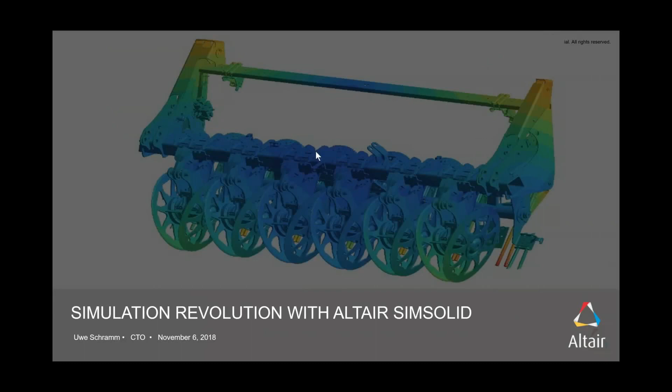So, Altair at a glance, a little business update to Altair. So we are around for 32 years. There's over 2,000 employees, 5,000 customers, and we have a worldwide network of offices where we do distribution of software, but also software development. So our development is not just in one place, we are all over the globe.

And our products are marketed under 4 different brands. So the most known is probably HyperWorks, where you find technologies like HyperMesh and OptiStruct. We are branding it today as a multi-physics optimization platform for CAE engineers. So it's mostly at high-end organizations, organizations that do a lot of CAE, like automotive OEMs and aerospace companies, but also other industries.

Later, around the design technology and OptiStruct optimization, we developed the concept of simulation-driven design. And this has been branded under solidThinking, where you find products like Inspire, and also the math products like Activate and Compose. And then two years ago, we did an acquisition in the space of the Internet of Things that is now marketed under the brand of SmartWorks that will do the digital twin technology and so on.

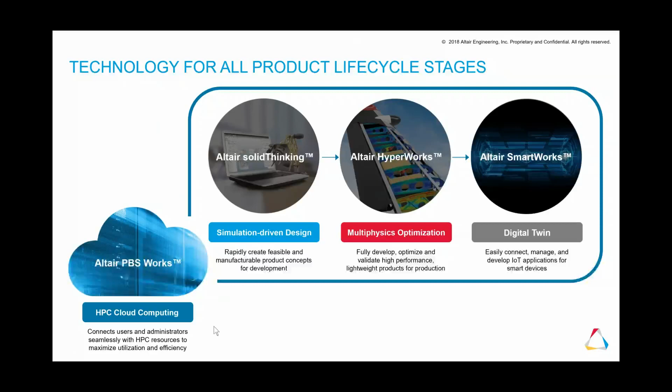And then, of course, for high performance computing and cloud computing, we have the brand of PBS Works, which started actually in the early 2000s with the acquisition of PBS from NASA. All our software technology is marketed under a units-based subscription model. You probably know the HyperWorks units. This year in September, we introduced the solidThinking units. So we have 2-tier units where you license our product.

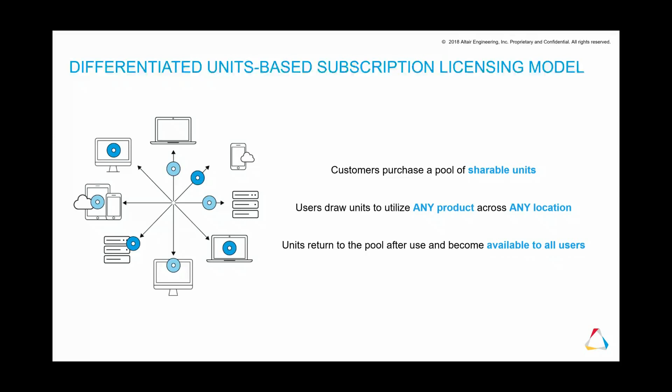So you buy a pool of units, and then basically the software application draws a number of units. When you're done using the software applications, the units go back in the pool, and somebody else can use the units, or you can open another software product. The solidThinking units are focused on the Inspire products and the math solution products, while the HyperWorks units allow you access to all the technology developed at Altair, plus a number of applications from our partners. So with the HyperWorks units, you have access to about 150 software titles. That is a lot of value that you get with those units.

Our vision is to transform design and decision making by applying simulation, machine learning, and optimization. And from that perspective, you really have to see the new technology that Ken is going to introduce to you. When we saw that technology, we were really excited to find a piece of technology like this that really helps to accelerate the use of simulation in decision making and during the design process.

Our software development focus is on mixed fidelity multi-physics development. So aside from typical finite element solvers, we also develop 1D solvers. We develop different couplings. We use data-driven analysis, machine learning in our simulations. And this is really where SimSolid fits in, giving more technology for modeling structures.

Computational performance is really important to us. So all our solvers are highly parallelized. In this day and age, we have CFD technology that's based on GPUs and so on. And you will see with SimSolid that the computation performance is quite amazing, and is really cutting down the entire process of setting up a model and getting a result. And then, of course, pervasive optimization. From the beginning, we built our technology around optimization, and we will also put optimization together with SimSolid at some point.

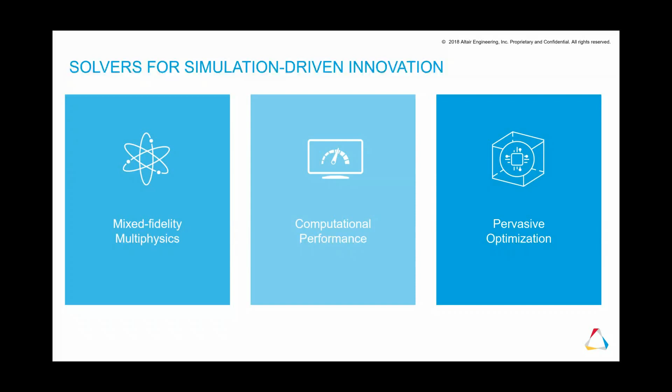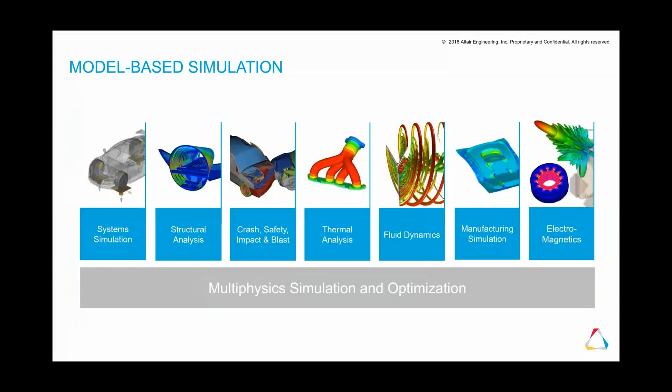So we cover the entire portfolio of physics: system simulation, structural, thermal, fluids, manufacturing, electromagnetics simulation. We have all these different solver technologies connected through solver coupling, but the main idea of using simulation in the design process is the connection through optimization. So we will build optimization into all these tools to do multiphysics optimization to a more or less degree. In OptiStruct, for example, you have a complete integration of the optimization with the physics, and you can use HyperStudy also to do optimization for other nonlinear physics.

So our solver technology really covers the entire physics that you need to design a product, and it's connected with design optimization, machine learning. And for us, when we saw SimSolid first, it was really that SimSolid is a good fit in structural simulation during the design process for designers to give easy access, and also in the context of Inspire, where we take OptiStruct technology and manufacturing technology and bring it to the designer, and we will do an integration further down the line.

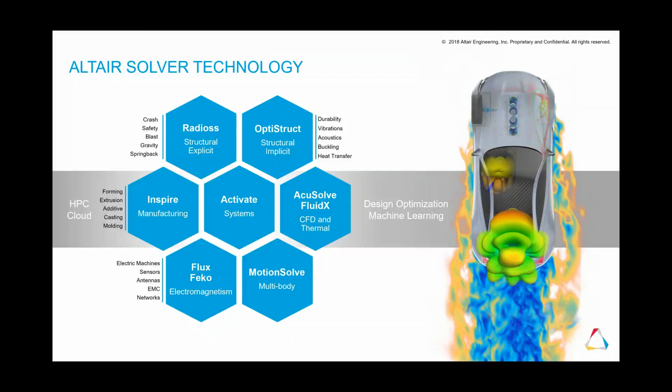Ken will talk a little bit about the business model. So it was for us really exciting that we could get together with SimSolid people and acquire SimSolid. We made the announcement in October at our ATC in Paris. SimSolid is working off CAD assemblies and provides really fast and accurate robust structural simulation without the requirement of geometry simplification and cleanup.

Victor, Ken, great people that joined the organization, and together we're going to pour investment into SimSolid and really try to bring a really great solution to you guys so that you can iterate faster and develop innovative designs. So that's about it for me. I will hand over to Ken to introduce the technology itself.

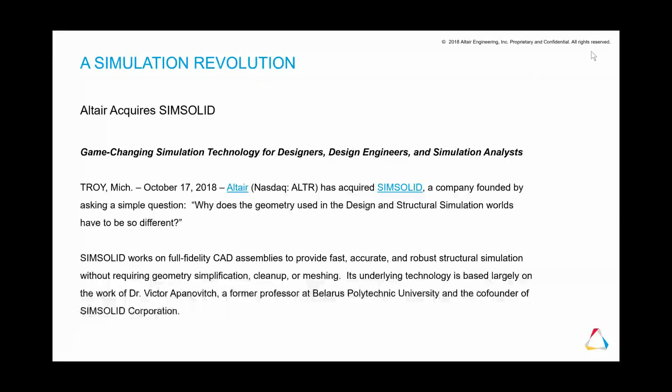Okay, do I have control there? Yeah, so show my screen. How's that? Can you guys see my screen?

Good. Yes. So I'm Ken Welch. I'm one of the two co-founders, as we mentioned. We started SimSolid 3 or 4 years ago, and when you start a company, you have to think about solving a problem. For us, that problem was what I called the mesh problem. So what was the mesh problem?

Analysis is just tough to do, and the reason it's tough is you've got to make a mesh, and making that mesh is a very complicated process. It's a very slow process, and it's complex to learn how to do it. Meshing is really a problem in the design process. If you think about doing design analysis, it's a time limited process. And if you have a very complex, long-winded, hard to use methodology like meshing, it just limits you in analysis.

It's funny, when we started the company, we talked to a lot of people, and there was a big disconnect we found in the CAD market. All the CAD guys were talking about, we have this democratized analysis. It's got a very nice UI and it's embedded in CAD. And all the users said that stuff doesn't work. And I said, well, how could it be? It doesn't work? Well, it works great. It just doesn't work on real world problems.

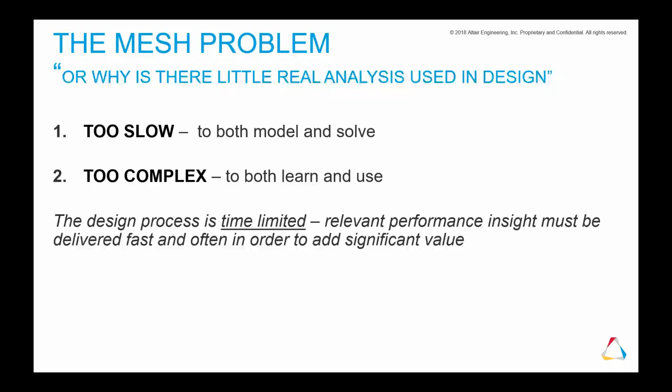And that's the thing. It typically works on very simple problems. And analysis in the past has been limited to very simple applications, which limits its appeal. So our view was to take a fresh look, and the fresh look is at a very core level. So SimSolid is a new technology. It has a few nice attributes.

Number one, it operates directly on the unsimplified CAD geometry. So you don't have to take the geometry and mid-surface it or defeature it and all those kind of things. Just take the original geometry and it works on that. And it doesn't create a mesh. So using the original geometry and not creating a mesh, it eliminates a bulk of the pre-processing time for analysis.

The other thing about SimSolid is it's very high capacity. We tuned it specifically to solve both large assemblies and complex parts. So take your original form, you don't have to go and break off just one or two parts. You can analyze a large subassembly or a very complicated part directly.

Now, because it's meshless, accuracy is controlled by an adaptive process. It solves multiple times, and every time it solves, it looks at the errors in the solution and locally enriches the equation and resolves. So it's an automatic adaptive process. You can't turn it off.

And we said if we're going to be used in design, it's got to be fast. Our target workflow is to give you meaningful results in seconds to minutes, even for a large assembly. So that's a pretty audacious goal. But when we started the company, we said those are the things you really need to have in order to have an impact with analysis in product design.

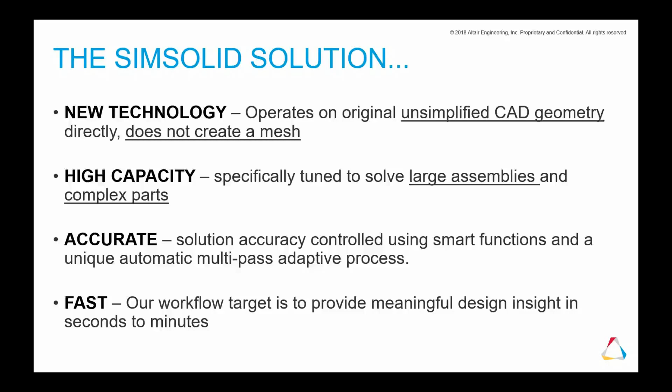So I talked about product design. So where does it fit? Well, clearly we think it fits in an area where you're doing rapid design ideation, right? So if you're trying to evolve a design and you want to understand the performance insight early and often, that's SimSolid. If you look at the classical product development V, we're typically at that front end.

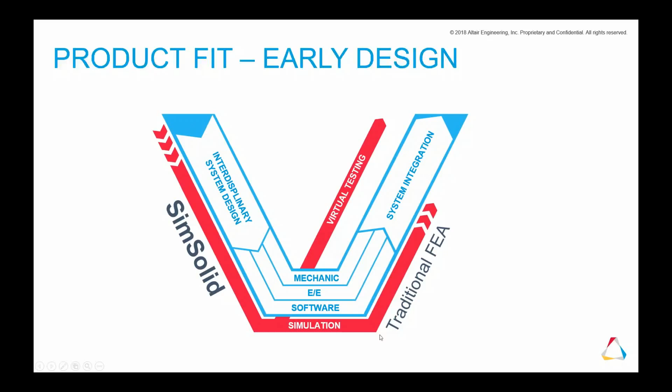We're not a validation tool. So it's really not to say, oh, I want to find the nth degree of stress. I mean, you can drill into stresses, but really the strength of it is using it in design. The traditional tools are over here in the validation phase.

So, what I always say is that FEA requires geometry adaptation to mesh. You have to change the geometry. Our goal with SimSolid is to accept it as is.

People say, well, the meshing's the easy part. I say it is easy until you have an assembly that has both big and small, thick or thin parts, which is very common, or until you have parts with extreme geometry detail, like small holes and fillets, or odd face transitions, which can be problematic for mesh generation.

One of the very topical things today is this generative design kind of parts, all these lattice parts. These are typically very difficult to mesh.

But the number one problem, I think, in terms of doing quick performance simulation is trying to connect different parts together. Parts may look aligned, but mathematically there's a small gap or an overlap, and this can be problematic in terms of bonding these things together or building connections.

One of the founding principles of SimSolid was we came up with a new method to build a connection between parts that can have a little ragged connection, that can be overlapped or gapped. What we do is use this connection as part of our criteria on the adaptation.

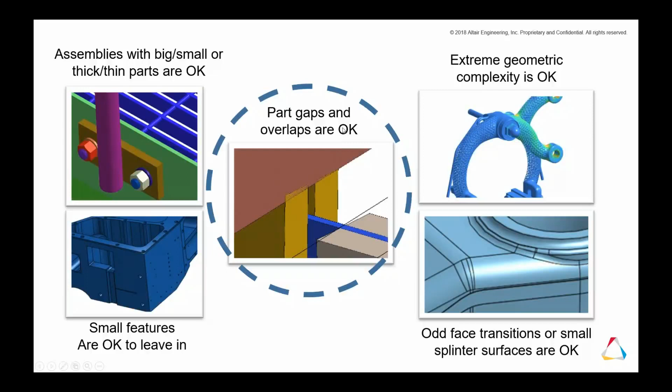So let's talk about how it works. I think everybody knows the background of traditional FEA. You typically have a simple region that for 3D is a TET. The degrees of freedom are typically point-wise, and for structural analysis, typically displacement-based.

Again, for TETs, 3 degrees of freedom per node is common, and the shape functions are low order—linear, quadratic, things like that.

SimSolid is much different. It doesn't have a region like a TET. The regions can be completely arbitrary. In fact, they can be whole parts. And the degrees of freedom are not point-wise. They can be associated to anything: volumes, surfaces, lines, or even point clouds.

So there's a lot of versatility in how we can construct the equations. The degrees of freedom are integrals—abstract coefficients, not physical displacements. And there can be many degrees of freedom per geometric entity.

The shape functions can be of an arbitrary class, and are actually derived on the fly for every single part, which is a little bit unique to our system.

But probably one of the most interesting things is this boundary compatibility. Now, if you take a cantilever beam and fix one end in finite elements, what you're saying is the degrees of freedom, or the displacements at that end, are exactly 0. You specify exact boundaries of 0.

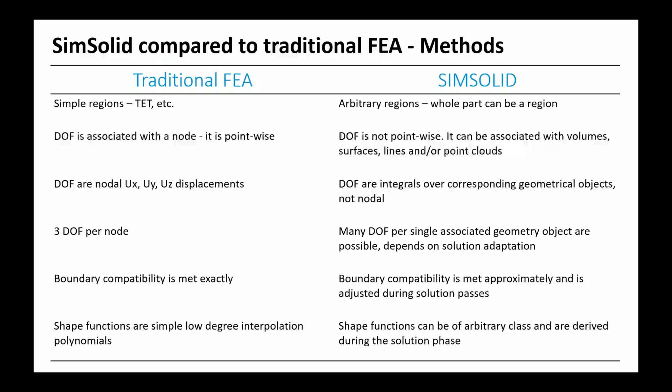If you think about accuracy, let's look at traditional FEA. A lot of the accuracy is really the decision of the user. You have to decide yourself what the appropriate level of geometric detail is, what type of elements, what type of mesh density, what distribution.

You have to decide for yourself, and this is where most people or many people get in trouble, is understanding the correct interpretation of the settings. If you look at dynamics especially, there are many, many settings that you can possibly set in traditional methods.

And every time you can change the setting, it's an opportunity for error. We find that many codes are not running incorrectly, it's just that the user's interpretation of the correct settings is not being made.

Almost all finite elements today can have automatic adaptation, H or P adaptivity, but typically that's rarely done for assemblies. For us, we have the full geometry detail - there are no elements, no meshing. We have very minimal settings for dynamics or nonlinear, even separating contact with friction, and our solution adaptive is always active.

So again, we're trying to build an analysis system for design, and all of these areas in traditional FEA are bottlenecks in design. You can see that's the reason we went on this route with SimSolid.

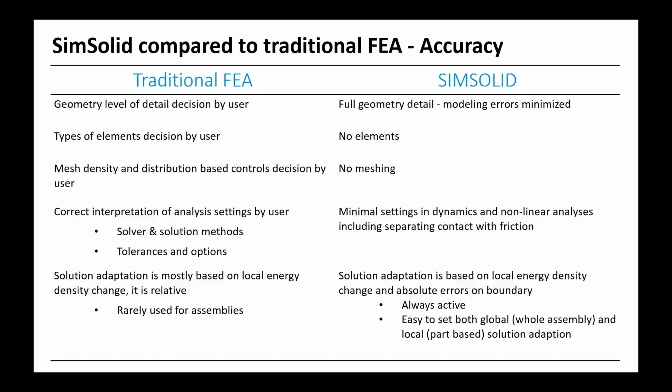So just talk briefly about what it does. We wanted to have a system that could run rapidly, but it had to be meaningful, so it does quite a bit for design code. It does linear statics, modal, nonlinear statics that can be either geometric or material. It does transient dynamics that can be time, frequency, or random response, and base excitation as well. It can do thermal and thermal stress, and we have things like inertia relief and bolt pretension.

Our materials today are isotropic. You can make parts rigid, and we have a simple elastoplastic model. This is an area we can extend quite a bit in the future, but today it is isotropic.

Since we really focus on assemblies, we spend a lot of time with connections. We have a rich set of connections that can be bonded, sliding, separating with friction. We can do bolted connections, spot welds, seam welds, and we can even do virtual connections, which are just rigid connections between different faces.

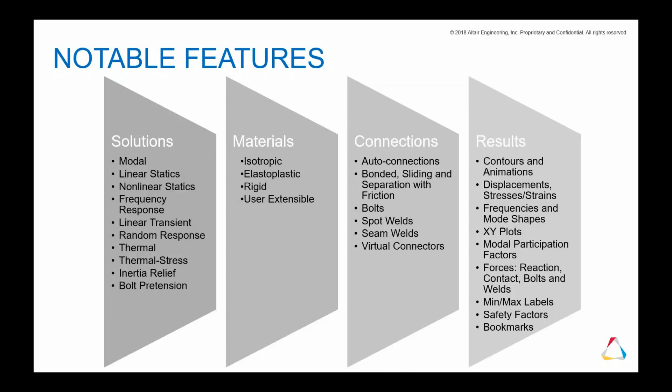So we'll show more detail during the demo. Just to give you a couple ideas on what the capabilities are.

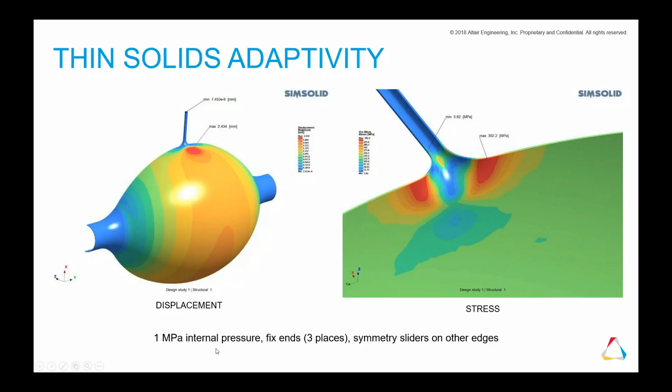We can do bolt tightening, and the bolt tightening is a little bit unique in that it's full 3D. There's some information on our website in terms of the theory we use, but it's a full 3D representation.

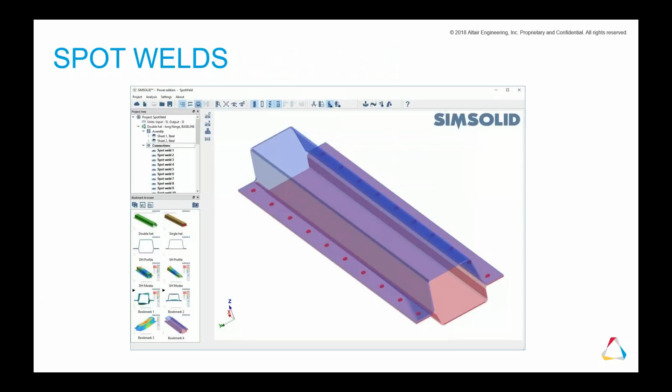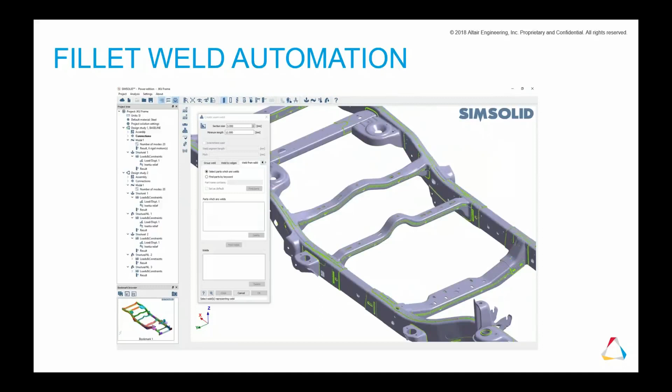We do spot welds - they can be applied manually, or you can bring them in from a CSV file. We can do fillet welds, and we can do fillet weld automation. The automation is interesting - we can bring in tube bodies from the CAD system and automatically convert them into welds. So if you have these 3D structures that are common in CAD, you can bring them in and convert them automatically. You can also make the welds manually as well.

We do sliding contact, bonded contact, and separating contact - this is nonlinear separating contact. This is interesting for us in that it runs fairly fast. I'll show you a demo of that.

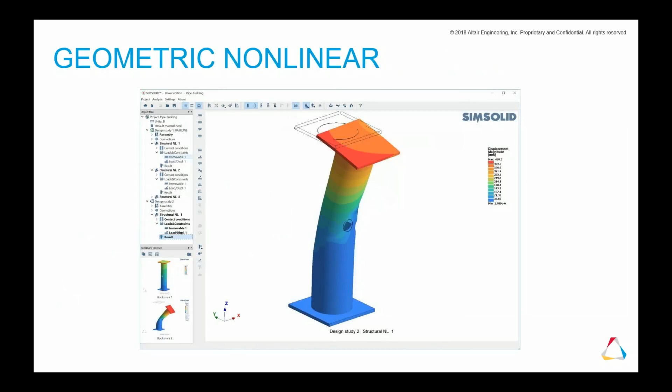We can do geometric nonlinear. We don't have linear buckling, we don't have eigenvalue buckling, because it really doesn't make that much sense for assemblies. But you can do geometric nonlinear to see if you have a buckle shape. We can do simple elastoplastic, mild nonlinear, really just for ductile steels, but we can do that and combine it with geometric nonlinear.

We can do transient dynamics, and that's interesting in that dynamics are really a data problem - you have to store a result for every time step, and it typically can be quite large. For us, we don't store any of that - we only store our analytic functions, and then we have a way to recover all the data in post. So if you look at a typical dynamic simulation, our result footprint is orders of magnitude less than what you see in traditional methods.

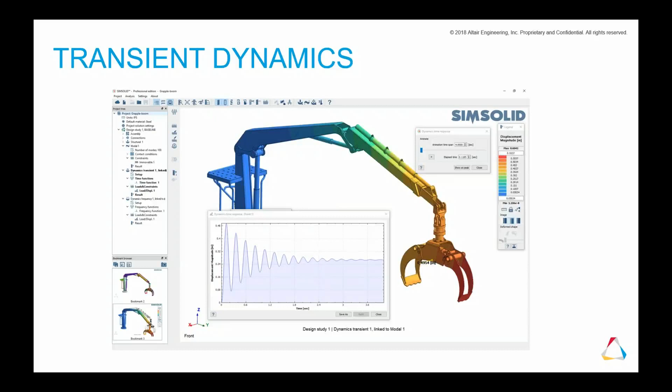Maybe a few quick customer applications, just to show you some typical ways SimSolid is used.

Serapid, a company in Michigan, are a very early customer and SolidWorks user. They build really innovative, very cool vertical chain lift technology. You can see they're quite complex, and they analyze typically the entire assembly, even sometimes with the lifting table, all done with SimSolid.

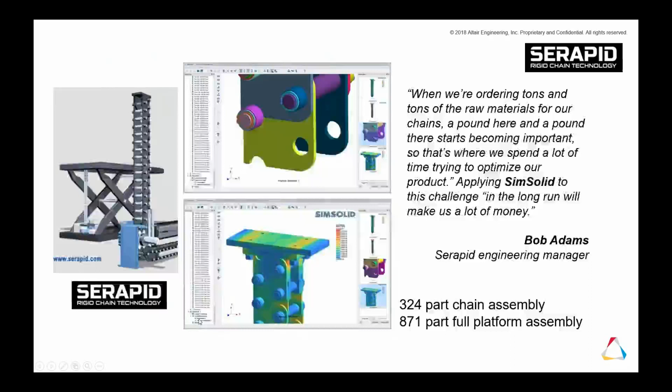Here's a second application. For them, they told me, honestly, we do an analysis but didn't use it as much as we'd like in the past because it was too complicated. With your stuff, we use it every day, and we can look quickly to understand, as we make design changes, how the load path is changing. They're not trying to look at detailed stress studies, but they want to know how their design is evolving and how the overall response is changing with the design.

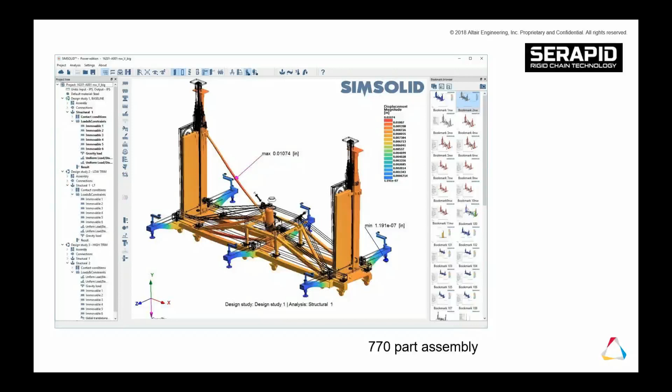You can see here, this is almost an 800-part assembly. They have many design studies with different design configurations they're evaluating in SimSolid.

Adron Handling is an interesting company. They're in the UK and make bespoke manufacturing equipment for automotive. This is an assembly line, a tire handler, so those are actually tires.

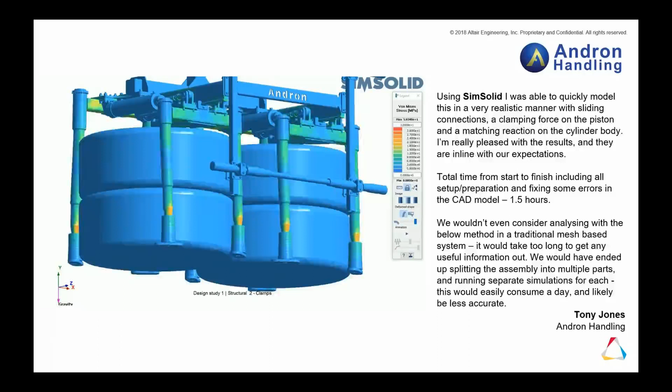This was an analysis they recently did. In the past they would have had to do a number of smaller component analyses and work to understand the load paths. They said with SimSolid, they could do this analysis start to finish in about an hour and a half, so they were very happy they could get insight quickly even on a very complex assembly.

This is another example of theirs. I like this one because it shows the difference between bonded and separating contact. The typical way would be to just take that plate and bond it to that tube - there's nothing wrong with that, and you'll get a perfectly connected boundary. But if you have bolts like that and make it separating, you'll get a more realistic distribution of the load.

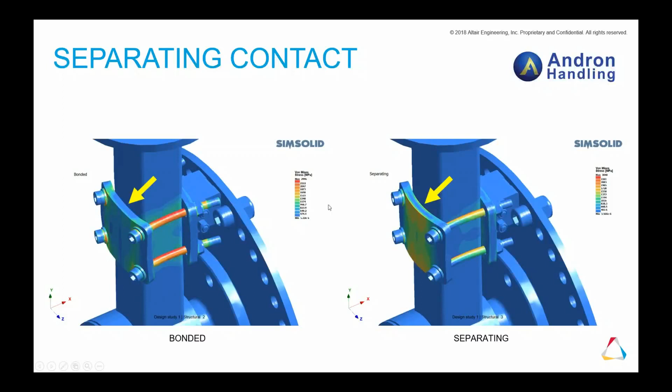This typically takes, I think this was about a minute to solve, and this one was about a minute 20. So it's really not that big of a penalty to turn on separating contact. It does iterate - it's nonlinear - but it's a nice effect to have the ability to turn on.

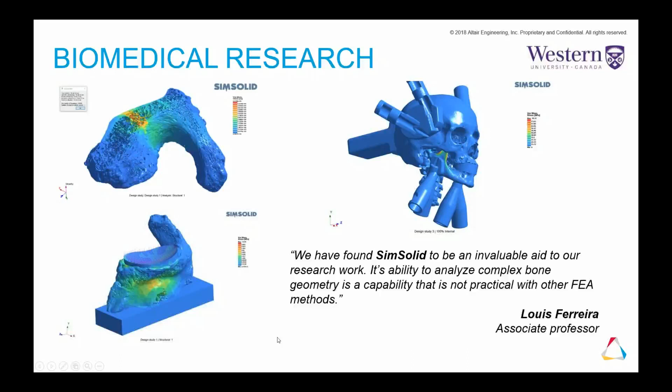Okay, why don't I see if I can start it up and do a little demo, let's just try it. Here is the product on our desktop, and this is what you see when you first start.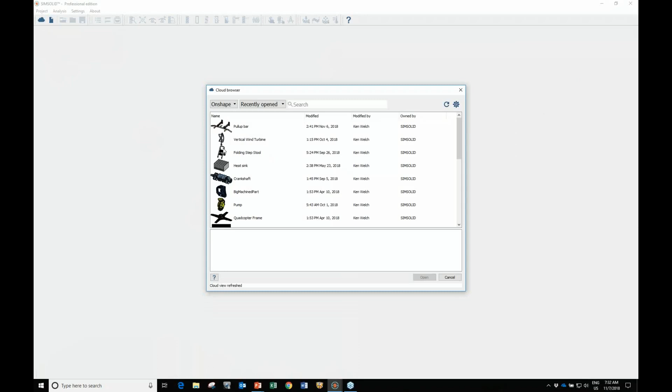Let's bring in some geometry. Now I can bring in geometry from just a CAD file - CATIA, NX, Parasolid, Step, etc. Or I can also bring it in from a cloud source - this is Onshape. So I'm just going to grab a model, and I'll grab this one right here.

I'm going to do a real quick analysis, but I just want to show you the workflow. So this is a pull-up bar. Let's first just create the connections - okay, so that creates all the connections. This is about 33 parts.

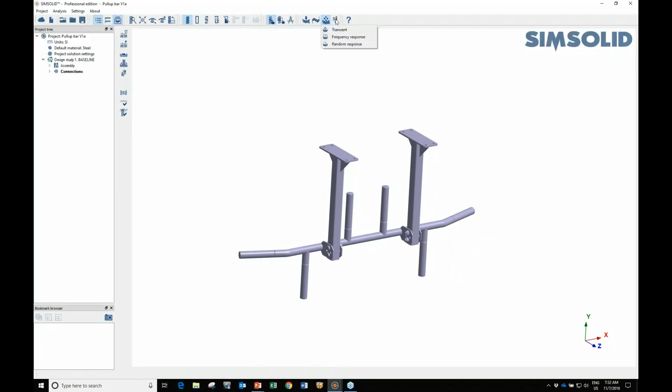Let's do the analysis. I can do structural, linear, non-linear. I can do modal, I can do transient dynamics, thermal, etc. Let's do linear - let me just constrain the back here, let's just do something quick.

And then let's just load the ends here - maybe something like minus 500 newtons, I don't know. Okay, then I just say go. That's it, so I didn't do anything other than that.

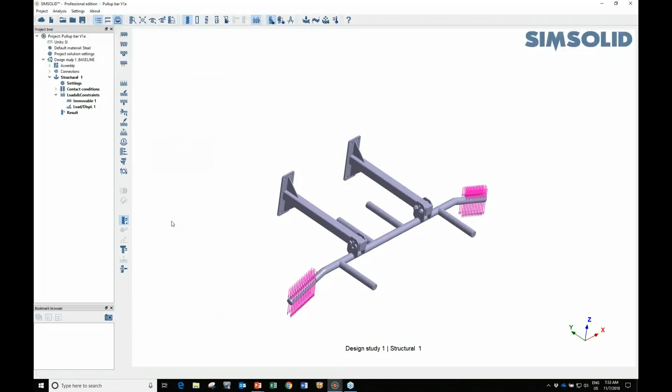It's now solving - 1, 2, 3 passes. In fact, that was solve, mesh, iterate. So I can now look at displacements - I think that took about 4 seconds to solve, and I can animate that.

I can bookmark that animation. Maybe I'll stop that, and instead of displacements, I'll look at stresses, and I'll bookmark that.

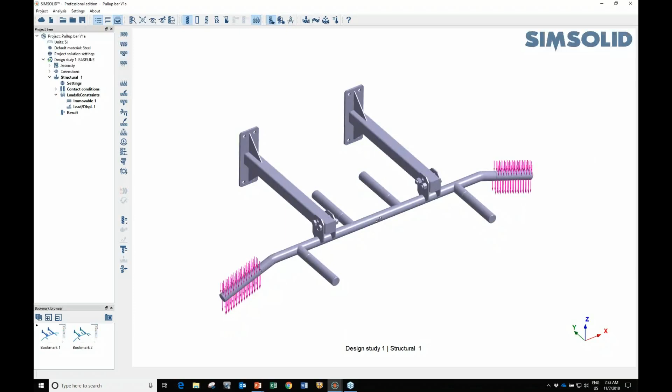So that's great. That's nice that I can get an analysis very quickly, but I can also do a few more things. Let's just copy that. Let's double click to edit the load. Let's just pick these 2 things and delete them. And let's move the load path. Let's move the load back here. Okay, let's just run that.

Now, reanalysis is even faster. I think it took 4 seconds for the first one. That was 2 seconds. And again, that was solving 3 passes. So it solved the pass, looked at errors, locally enriched the equations, resolved, relooked at errors, and iterated.

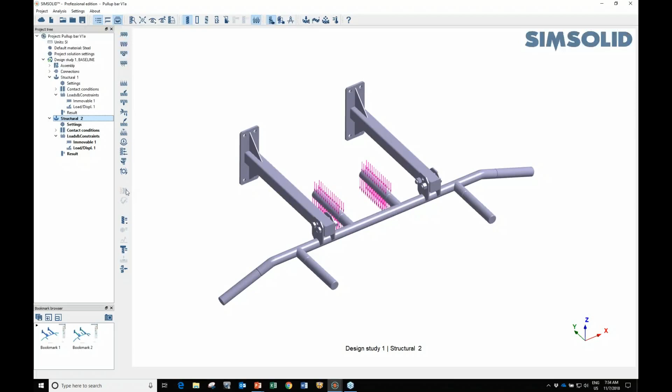And if I pick the bookmark, it'll go back. You see where it's bold here. This is the first result. So there's the first result. But I can just pick down here, and there's my second result. So I can very quickly go between, there's my displaced shape for load case 2, and there's for load case 1. Okay? And I can do the similar thing for stress. There's stress for load case 1, stress for load case 2.

Well, I think that's pretty cool. I mean, I can do a very rapid analysis and assembly. And I can also tweak the values if I want to drill into more local stress detail and things like that. But really what's the power of the system is you want to understand design change. So let's assume I go back to my CAD system and I grab a different configuration. I could have changed the model in the CAD system or just grab a different configuration altogether.

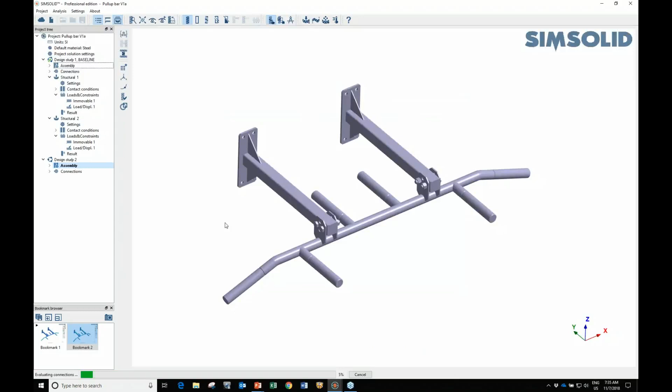And as I pick this one here, it'll bring in the changed geometry. But you see what happens, it says, this is new geometry. I'm going to assume it's a second design study. I'm going to copy down all the boundary conditions and load cases from the first. So everything's ready to go. All I have to do is pick here, and it'll run both load cases. That's load case 1 it's running, and then there's load case 2.

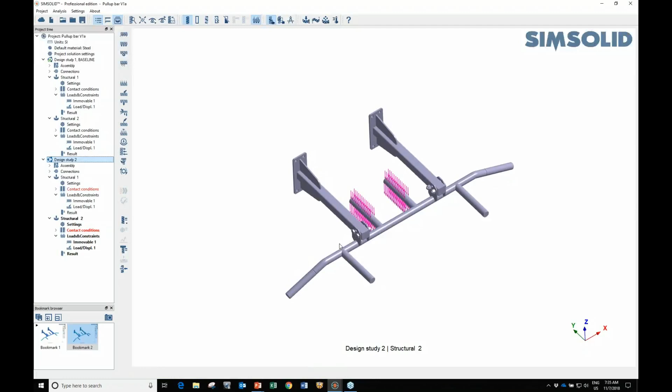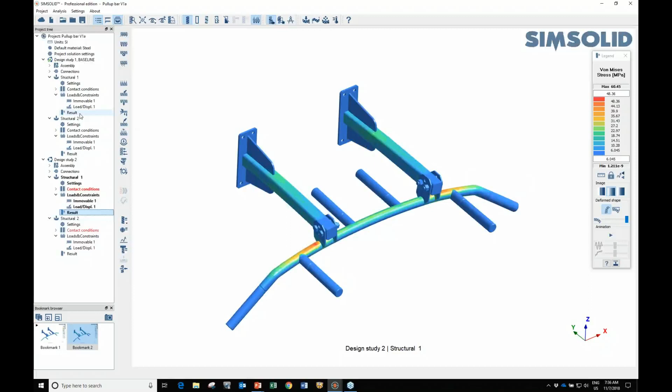Okay, so now I've just run 2 load cases on 2 different geometric configurations, and I can scan through there the same way. There's geometry 1, and I just pick here, there's geometry 2. You see that the back is a bigger thing. So I can go quickly between geometry 1 and geometry 2. And the same thing for stress. There is stress for 1, there is stress for 2. Back and forth. And again, also for 2, I can look at load case 2, load case 1.

So our workflow is we're trying to say, I want to do it on the real geometry. I don't want to simplify it. I want to make as few assumptions myself as I can and get a result quick. Now, there were a few things that happened in the background that made it go fast. One, geometry comes in, we evaluate the geometry. If we see bolts, let's find it as a bolt. And we use that because we want to do a bolt pre-tension later.

But also, as we identify bolts, we actually change the connection condition from bonded to sliding. So although it just came in and you just said connect, it made bonded connections, it made sliding connections, it went through the whole model. So there was a lot of automation behind the scenes that allowed it to build that analysis so quickly.

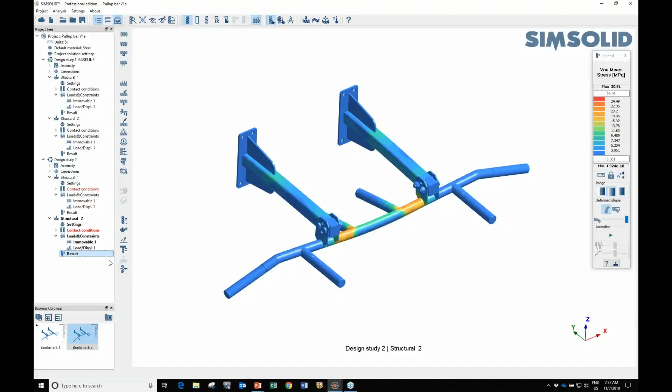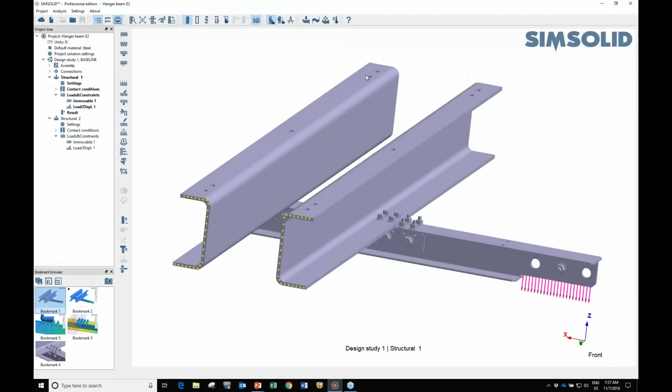In fact, let's try a second example to drill in a little bit more detail. Let's go to this model. Now this is a little bit bigger model, not much. It's I think 55 parts, and this was a benchmark that we got. People really wanted to understand, can you drill into the detail of a bolted connection, right? So here is the initial. It's a simple pull down here and just constrain the back, and it looks like this. So it's a very simple load case, right?

Now, here's the challenge. So this is the default load case, although we've made this a 4-pass iteration. So I boost the resolution just a bit. But if you look at the displaced shape, it assumes that this big beam is bonded to this big beam. So it's perfectly bonded. Well, that's fine. That gives you the overall load path. But if you were really concerned about the stresses in the bolts, it's probably not a good idea because the stresses are being carried by that big beam connected to the big beam.

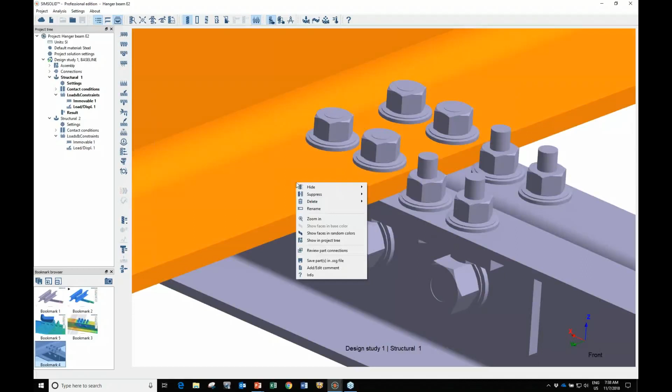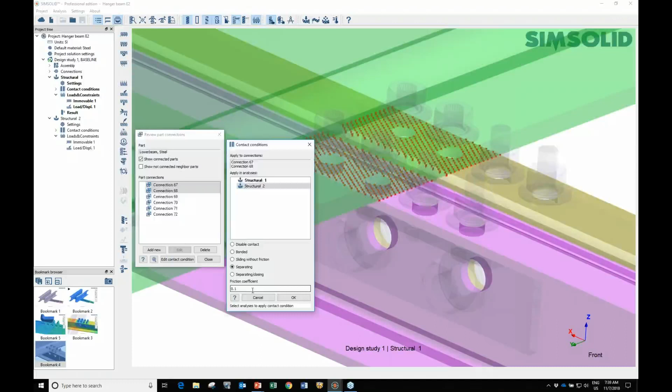Okay, so if I want to get a little more detail in the joint, what would I do? Well, one thing I could do is eliminate that bonded connection there. So the way I do that is I just pick here, I say review part connection. I look here and there's a connection for that part, and I know that one and this one, those are my 2 bonded connections there. The red indicates bonded. So if I want to edit that, I just say edit the contact condition for structural analysis 2. And instead of bonded, let's make it separating with friction coefficient of 0.1. Okay, for structural 2, separating contact, okay, close.

That's all I got to do. Now let's run structural 2. Now this is, I got a 55 part assembly and I'm doing 4 passes and I'm also doing nonlinear contact. So that ran, you know, how long did it take? It took 7 seconds to do. It's fairly fast.

But if I go and look at my results here, again, I picked my bookmark. You see it's bold, so this is the first load case. If I pick down here, you can see exaggeration, then I am starting to separate there, right? So I do have separation of displaced shape. And if I look at, again, the stress state, here's the stress state of the bolts for the first one. Here's the stress state for the second one. So now I'm getting the stresses in those bolts as I would expect. I can do one more level of detail, though, pretty easily.

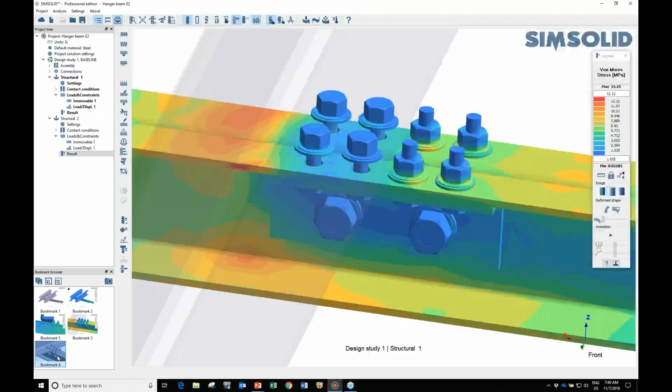Let's copy this down. Let's copy here, and here let's actually pre-tension those bolts. So the way I would do that, I just pick the nut. I could just pick these. Let's just pick those 4. And now I just specify a thread pitch, and I have a couple of methods I can use to pre-tension. I can do a turn of a nut, so, you know, quarter turn or something like that. I can do a torque and friction value, or I can just do a target axial load.

So let's just do a target axial load. Let's say I want to stress these to a target load of 3,000 newtons. I can do that. And now I can just run this. So this is 4 adaptive passes, nonlinear contact, and bolt preload. So it's quite a bit going on, but I'm going from a kind of a general view to a more detailed view on my result there.

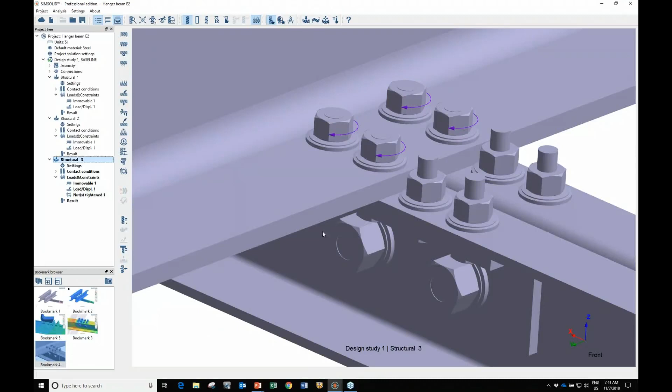So here is the result. There's my displaced shape 1, displaced shape load case 2, displaced shape load case 3. You see the bolt pretension pulling it down a little bit. And again, for the stresses, there's the stresses with bolt pretension.

So look, what we try to do with SimSolid is, it's a design tool. It's not a validation tool. Its primary intent is doing rapid design iterations, but we want to give you meaningful performance insight quickly on large assemblies or complex parts. Now, quickly, here it was a few seconds. Many parts are like that, seconds to minutes. Bigger models can be 5-10 minutes. But the ones that are solved like these lattices in 10 minutes, that might be hours someplace else. So we're really still trying to give you meaningful results quickly.

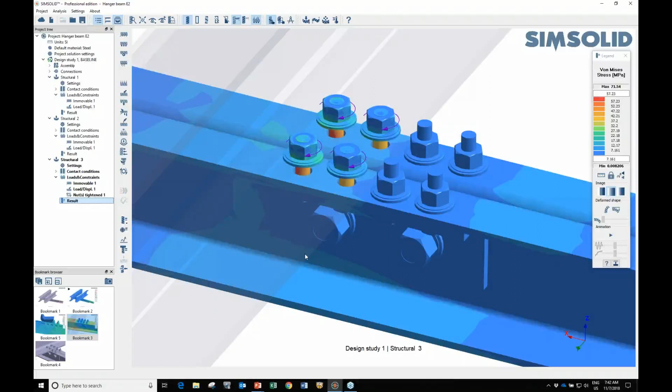And also, it's not just the solve time we're talking about. We're trying to reduce the workflow time of creating the mesh, tweaking the geometry. The goal is to work directly off the design geometry. Okay, why don't I stop there? Let me go make a few other comments.

You know, it's been very exciting for us being acquired by Altair. I think that it really allows us to push this technology in a lot of different ways. There's a lot of great technology at Altair that I look forward to coupling to. So there's just a lot more things that we can do. Today, our product was historically sold as a fixed seat license, and that's the way it is right now. But we're in the process of integrating to Altair's HyperWorks Units licensing, and we expect to release that later this year.